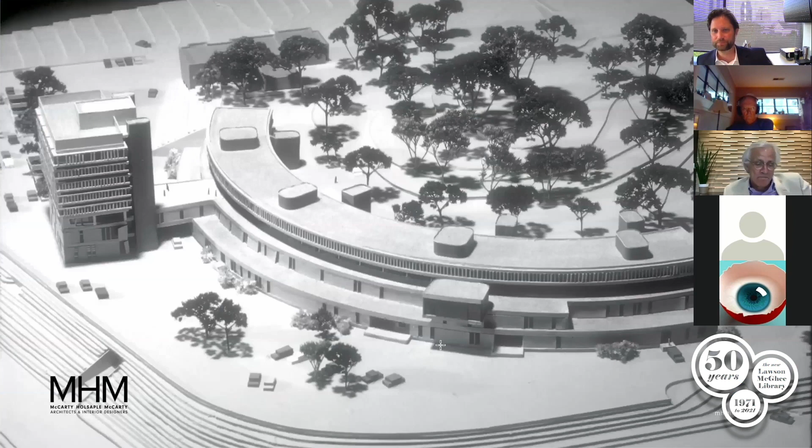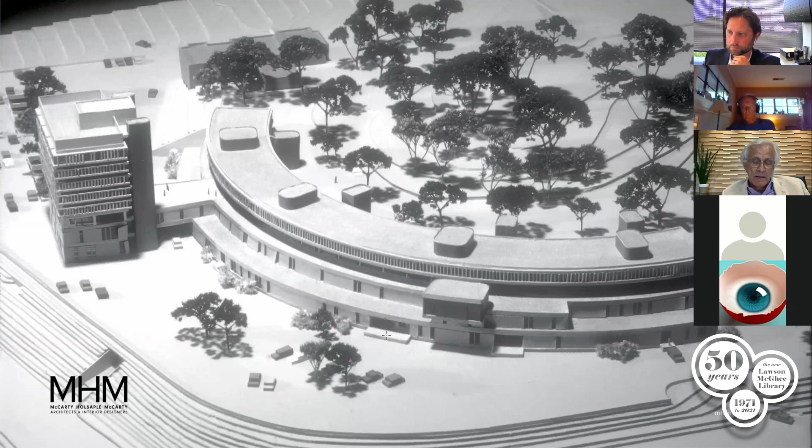This is back when, I think, I first started realizing that I might become an architect. I was in my teens. I think we had the date of 69, but that's when it was pretty much finished. He started designing this building back in, I'm thinking 63, 64, when I was 13, 14 years old. We're up in this mountain house that I mentioned, which is just a beautiful house that he designed with glass looking to beautiful views of the mountains. This was our vacation home. We'd go there once every summer, or quite a few times during the summer. But a lot of times Dad would take work up with him. Architects tend to keep drawing, can't stop.

And he was developing the concepts for the communications building, working with his T-square and his radius, compasses, etc. I went up and started asking him questions. I know Don Freeman's on the Zoom, and Don knows I have a lot of questions - you need to ask questions before you get the right answers. So I started asking Dad about how he was developing the concept. What was the program? What was the concept of wrapping around Circle Park, basically? How did these stairways relate to the interior of the building? And I noticed that, we're very different personalities, but he has some of the patience that sometimes I don't have. He would just spend hours talking to me about different ideas, different concepts of why he was doing what he was doing. And I think that particular summer evening is when I started thinking that I probably would follow his footsteps and become an architect.

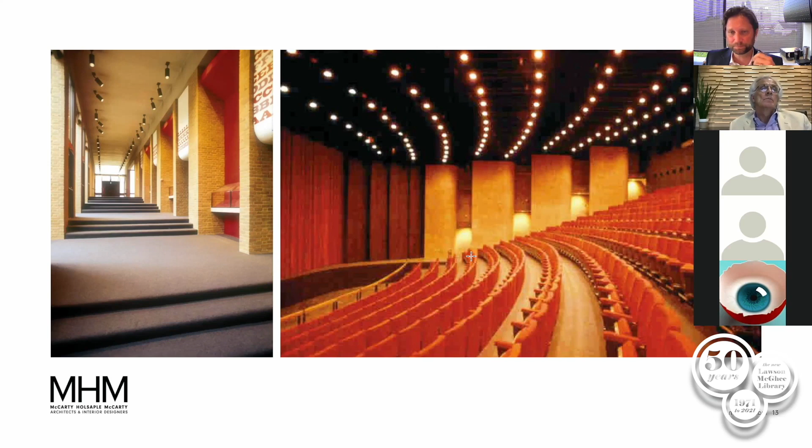That vernacular transcended through all the structures at that time. That was part of Bruce's work and part of that time period.

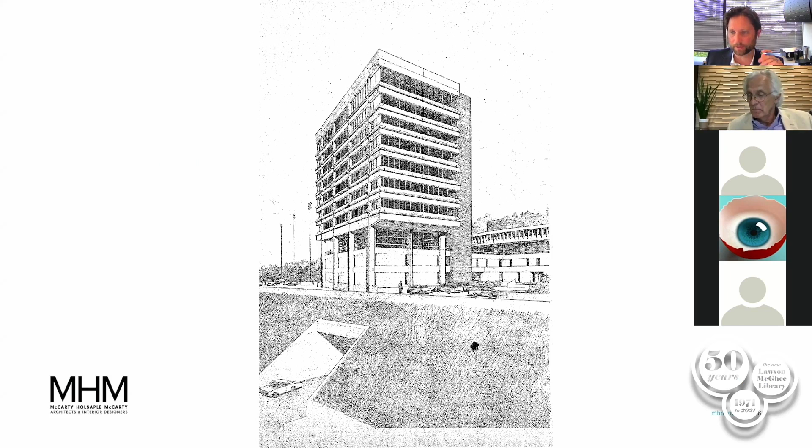But a lot of the same design vernacular transcended and was used here.

So I'm going to turn it over to Doug to actually talk about the design of the structure of the library structure itself. Thank you, Nathan.

Now to talk about the building we're celebrating tonight. This first slide is just sort of an introduction slide, but you start seeing some of these guiding principles or concepts running through a lot of these buildings. I won't repeat what Nate said, I will be repeating it some, but not on this slide. So let's go to the next slide.

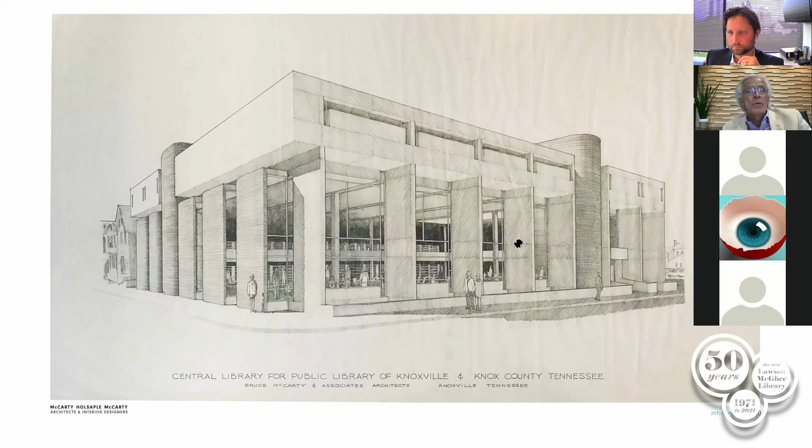Notice the ribbed concrete elements above, and then go to the next slide. Another thing that was true, not only going the wrong direction - there you go.

And this is one example. If you go back and forth between the two, this particular earlier design had a much heavier top to the entire building of concrete, and that just wasn't appropriate.

Look at the difference in the beauty of the previous design versus the way this rendering was. This was well into schematic design, but he wasn't happy with it. So he kept studying it, and then he broke down the forms that needed to be solid on that upper level. But he allowed slit window strips both on each side and above the ribbed concrete to fit into the main frame of the building itself. I think it was a real improvement that also shows how he would study and study until he got the right solution.

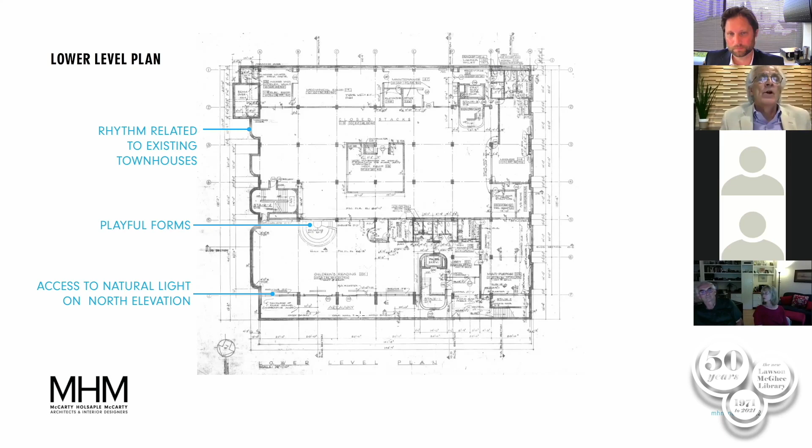Now I am, yes. Okay, so now we're getting into the floor plans, cutting each building at each level. Starting at the lowest level, the main area to talk about is the children's area. This is basically in a basement area, which sounds pretty wrong for putting children down there. But the way he resolved this is by having the areaway toward the street, which brought natural light into the building and created a very nice space. Within the space, he has some very playful forms that add interest for the kids, and little dropped wells where they can have their storytelling.

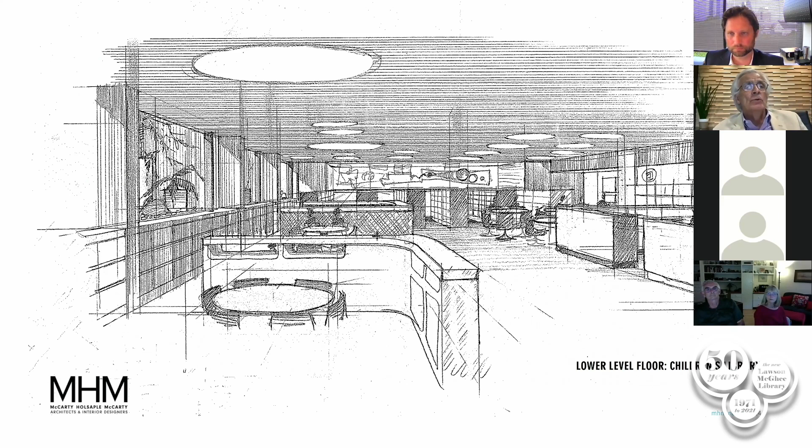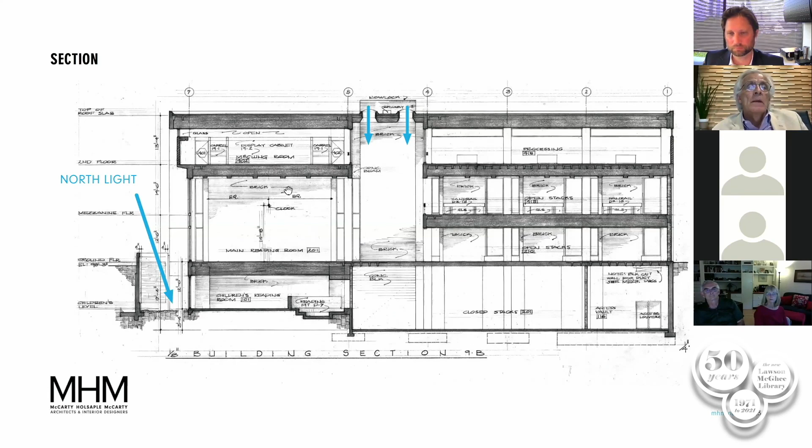Now going back to the lower level, I want to go back to the rendering of the lower level, Nathan. Yeah, sorry, you're delayed. You and I are delayed for some reason.

So this is basically a rendering, and Nathan mentioned Pat James, and John Aliard was another designer, more of an interior architect working on the project. He was very involved in developing these renderings and developing some of the more playful ideas within the building itself.

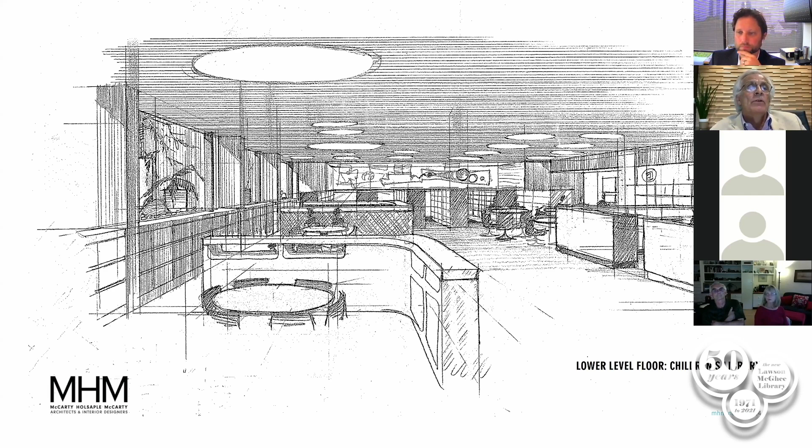And the main level is where the main living room space is. I call it community living room, and I really think it is that, or really was that before a lot of the other buildings and hotels were built downtown. It's really one of the main big ideas of the building, that it's the place the community gathers. You may come at lunch break and read the newspaper, and it's just a very comfortable, pleasant space to be. I think it became, in this part of town, a real place to meet people and to gather, and to just sit and read as appropriate.

You're looking into the natural light and the views back to the street. You've got the rounded forms of the stairways expressed outside and inside. You've got the brick that goes inside and outside, blurring the materials between the indoors and outdoors. You've got unique elements on the east elevation that bring natural light into the space, but also a lot of masonry to shade and keep the sun from coming directly into the stacks. So there's not a lot of glass on the east and west elevations. You also have the playful forms of the spiral stair, which were painted bright yellow for many years—I believe that's no longer there, but that was a very playful sculptural element within the building.

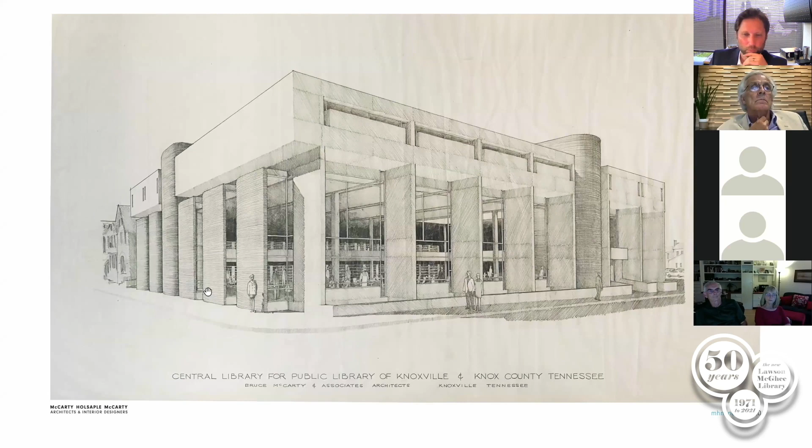Doug, you may want to mention one of the interesting parts: these forms on top, obviously for the nice north light, which was great, and he shielded the east and west light by incorporating these forms. But these forms also created a vertical rhythm that was at the time based on the townhomes that were on what's now the federal site. Yes, which you can actually see in this rendering here. I thought it was an interesting play—these forms, at the time, were kind of reminiscent of the townhomes that were there, that are no longer there.

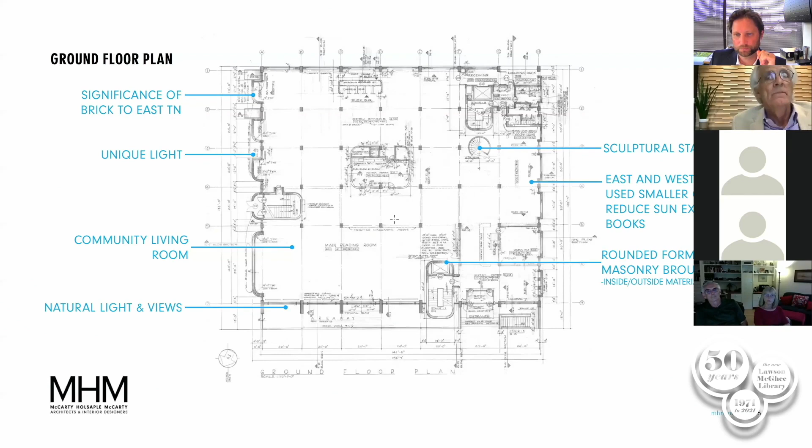Okay, now going to the mezzanine level. This is the main community space, the community living room.

You need to. You should be on it now. Just give it a second.

Taking advantage of this living room space, most of the library opens out into it, so when you're on the mezzanine, you still feel that you're part of this very important central space.

We've talked about the south, west and east elevations not having as much views and natural light because most all of the natural light is coming from the north.

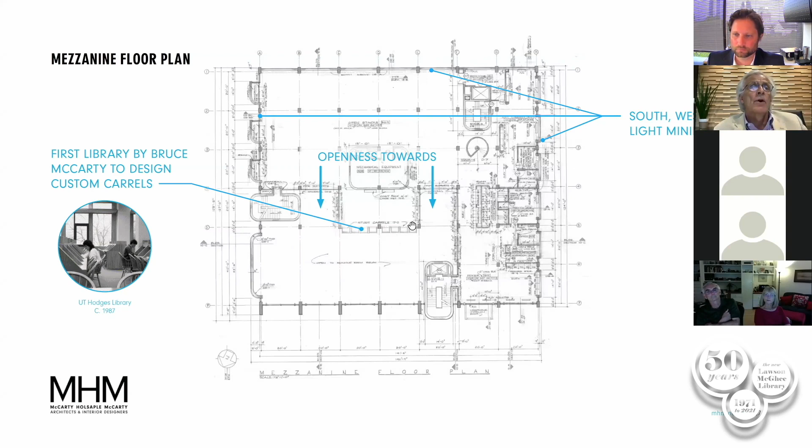Another feature on the mezzanine - this is really the first time in the library design, I did the same at the UT library, that the study carrels were built into the architecture, and you'll see that in some of the renderings and photographs later on. That's an example of how design was so important, down to the very detail of the furniture in the building.

The top level, the second level, is to show the natural light. Not only is most of the natural light coming from the north, but also at the entry of the building there's this three-story space with wonderful circular skylights that bring natural light into the entry itself and also into other spaces deeper into the building.

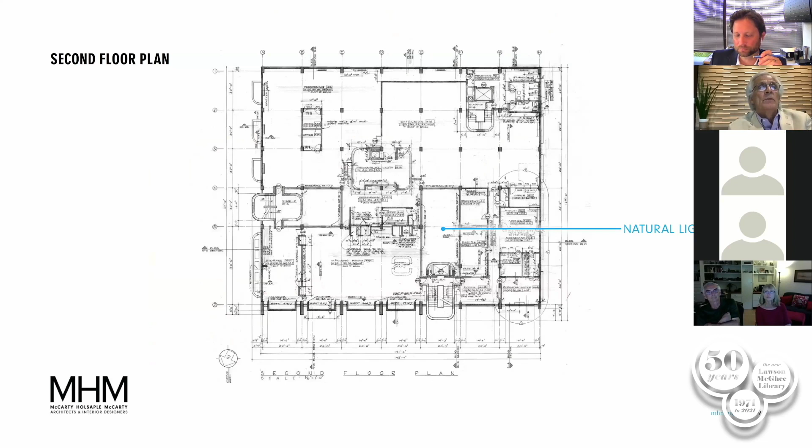That shows how that really makes that entry element much more delightful and exciting as you enter the library. You also see the brick forms happening, that come from the outside of the building to within.

This section shows the natural light again, the skylights again, so that whole portion of the building just had sunlight all through it, and other spaces borrowed light from that central space.

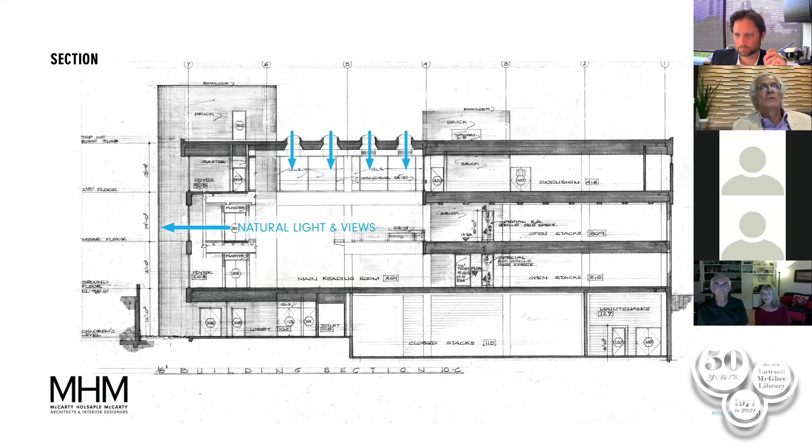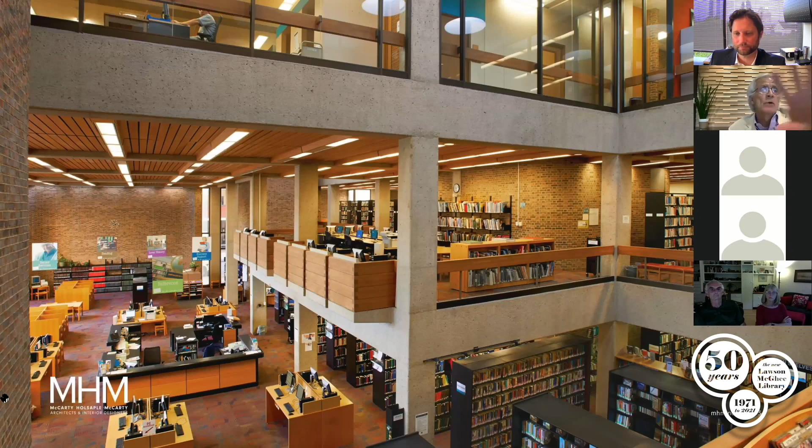And then the last slide - I really love this slide that Nathan found, because it tells the whole story of the building: the really strong concrete frame, the carrels, the built-in furniture, the living room.

The big idea of the project was the living room space where people could gather, and then you've got the natural materials of the wood, the natural light - you even see reflections of the circular skylights in the windows above.

That pretty much completes our discussion about the library. We'd now like to, if anybody has any questions, have a discussion about it.

Can you hear me? Am I? Yes, okay. Stuart is asking, will phase 2 ever happen in the John Duncan parking lot?

I think the answer to that probably is no. Nelda may have some ideas about that, but I think that may be difficult because the GSA, the federal building property, pretty much took over that property. And at this point I don't think expansion is necessarily needed.